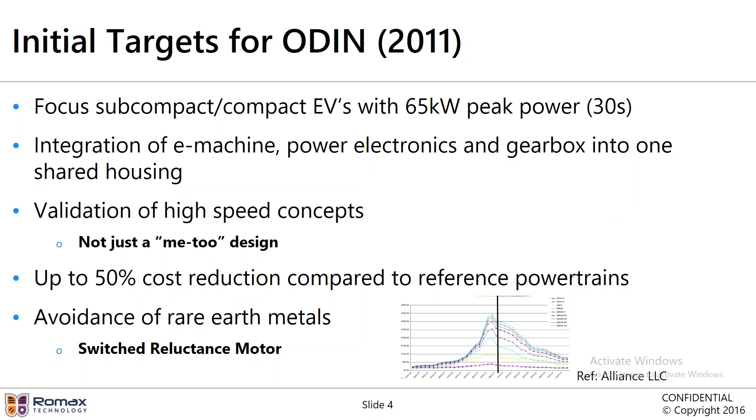Also at the time, we were tasked with avoiding rare earth metals. The graph you see there is the cost of rare earth metals, which going through 2011, prior to the setup of the project, had seen a price spike. This looked quite frightening at the time, so the change to non-rare earth metals was very much desirable. In setting up the project, we thought a switched reluctance motor is a design which hasn't really been used that much, certainly not for the main propulsion system, but it is worth investigating to see whether it can be used.

Prior to that, Romax had been busy for a number of years doing work on electric and hybrid vehicles, and the work we've done on ODIN has led to many other projects because we gained a lot of experience. You can see here the ODIN project is one of many projects Romax carried out during that time frame. Before the consortium was selected, we'd had reasonable experience in electric and hybrid vehicles, and we'd been working with some of the consortium partners previously. We were invited to join the consortium in order to carry out our work.

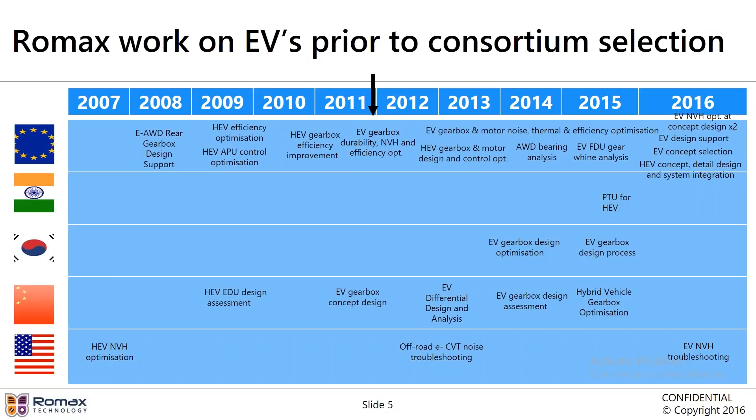We said that switched reluctance motors were one of the key items we were looking at. We know that switched reluctance motors have a very high dynamic content in terms of torque ripple, and so our experience in dynamic simulation was one of the reasons we were brought into the consortium. We also have ISEA from Aachen University, who were experienced in the design and simulation of switched reluctance motors, especially with regard to innovative control systems.

And then the consortium was led by Bosch, including GKN Driveline for the design and manufacture of the gearbox, SEAR Automotive for the manufacture of the housing, Fuchs for the design of the oil and supply of the oil, and then Renault was for the vehicle integration and setting the vehicle targets. The demonstrator vehicle is the Renault Zoe, and that's the application for which the driveline is being designed. And then the consortium was put together and the project was kicked off in September 2012.

So as we went through the initial parts of the project, we came across common challenges which are, I guess, common to all electric vehicle designs. What's the best layout? How many gear stages should we have? What's the overall ratio of the gearbox? And that will affect the overall maximum speed of the motor, because at the vehicle maximum speed, the rotational speed of the differential, I guess, is fixed. And so if you increase the overall ratio of the gearbox, then the motor can be smaller and more compact.

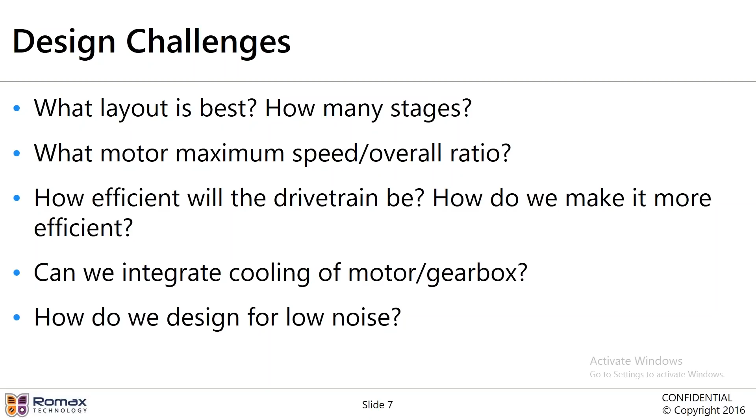In looking at the gearbox and the impact of the gearbox on the motor, we carried out some initial considerations. GKN and Romax were discussing this in the early parts of the design process, and we came up with some ideas. The obvious ones are simply single-speed gearboxes with maybe 2 stages, maybe 3 stages. There are actually some other ones. We can look at maybe two speed options. So 2 SP means 2 speed options. We could look at 3 speed options. Maybe we could look at having 2 motors. Some of those ideas were being expressed as possible designs.

And of course, in a design process, it's difficult to really simulate all of these and really do a quantitative assessment to see which is the best design. So at this particular stage, a lot of them were really qualitative. We were able to compare each of these layouts and each of these options really to see what did we think was the best design with regard to a series of design requirements and a series of design options. Different layouts here also express P means parallel, E means epicyclic, because we could have 3 stages which are parallel, parallel, parallel gears, or parallel, epicyclic, parallel, for instance.

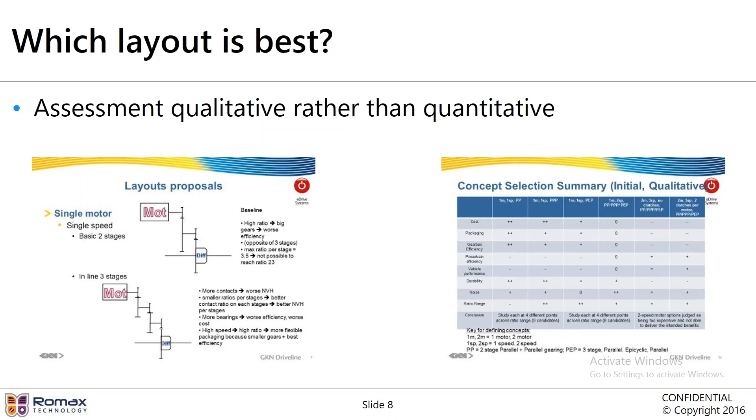And since we could still get a decent high-speed motor with 2 stages, we decided to go for 2 stages. So a simple single-speed gearbox with 2 stages seemed to be satisfactory for this particular application. Really no need, no benefit in making it more complicated than that. But it would still give us a decent amount of innovation, because of course we'd still go for the integrated cooling, we'd still go for the high-speed motor, we'd still go for the design for low noise. Having selected that, there's still a little bit of uncertainty. Okay, we knew we wanted to go to high speed, a high overall ratio, and this would achieve a smaller, lighter, cheaper electrical machine.

Okay, it would mean that there'd be a higher overall ratio for the gearbox, but there is still some uncertainty at this particular time. At Romax, we'd done a large number of projects, and we had done efficiency improvement projects for gearboxes for electric vehicles, and we've got a lot of test data where we validated our simulation against test data for the efficiency of gearboxes. But these were at conventional speeds, much lower input shaft speeds than we were considering here. And we didn't really have any test data to validate against for the high speeds which we were looking at here.

Indeed, we discovered at the start of a project that it was difficult to find test facilities to run at these particular speeds. Also, we weren't really able to do that much simulation of the overall driveline efficiency at these high speeds. At Romax, we could design gearboxes in Romax Designer and simulate the efficiency very quickly, in a matter of minutes. We could get the efficiency maps very quickly. But the corresponding efficiency calculations for motors using 3D finite element analysis took days, if not the best part of a week, to do an efficiency map. So it was very difficult to actually come up with a driveline efficiency model which was providing results in the timescale that was suitable for the design.

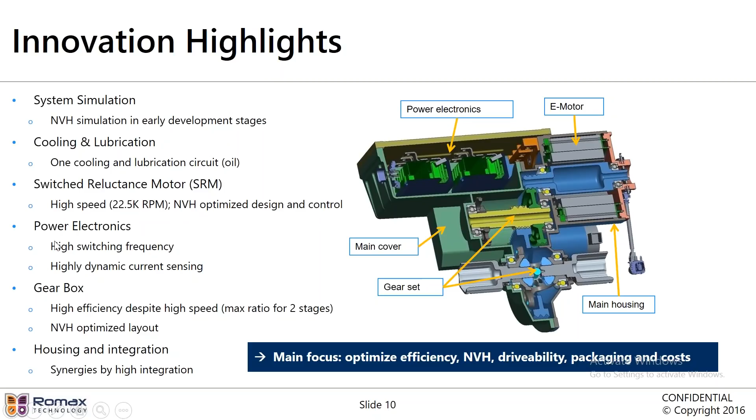So, in order to mitigate those high speeds, we would bring in NVH simulation in the early parts of the development process. Romax was able to offer that. And we're also looking at high degrees of integration with regard to cooling and lubrication. Aachen University were to develop optimized design and control of the switched reluctance motor. And from the power electronics, we would have high switching frequency and highly dynamic current sensing. We would aim for a high efficiency gearbox, which was going to be dry sump in order to overcome some of the problems with lubrication and high speed. And we were going to maximize the overall ratio with regard to what was possible for 2 stages. Of course, the NVH would be optimized for this particular design, and we would also look at any synergies that we could achieve with integration between the power electronics, the motor and the gearbox.

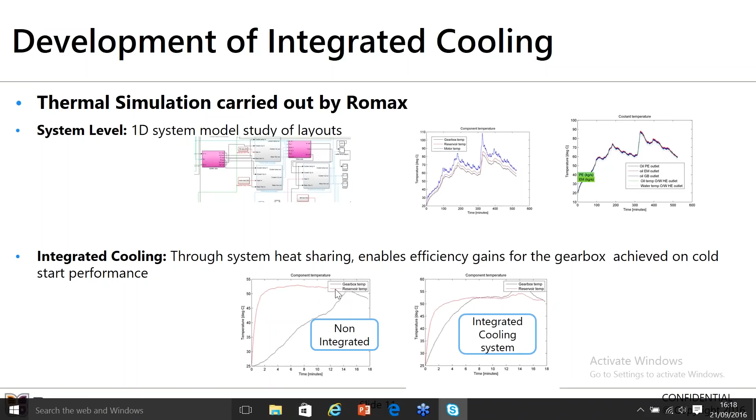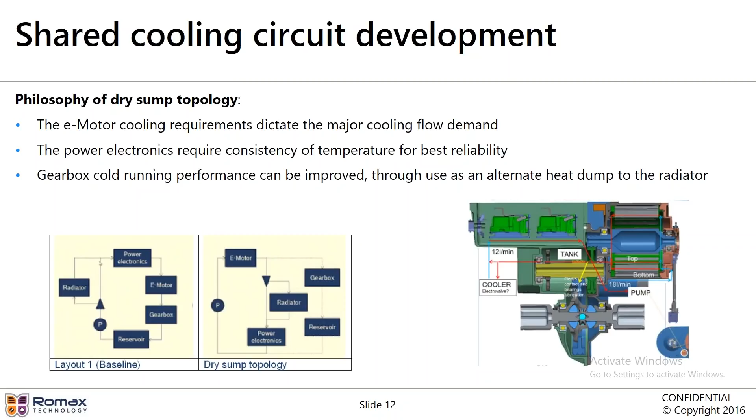Okay, this is also integrated with the idea of a dry sump topology, which enabled us to look at the best cooling circuit and also to design the gearbox for greatest efficiency. We also had to consider cooling the power electronics as well, because they require consistency of temperature for the best reliability.

The design of the lubricant was also carried out in this stage. We see that in the design and operation of an electric vehicle, we have a range of different operating conditions, from high load, low speed conditions to low load, high speed conditions. And this gives us different challenges for lubrication. Of course, in all of these conditions, we can simulate using Romax Designer what the tooth contact is and what the sliding velocity is at each part of the tooth.

And this data, we were able to supply that to Fuchs in order for them to actually start to develop the lubricant. So they were able to develop lubricants. They can carry out some mini traction machine tests, and they also had FZG tests for scuffing and load durability, and we can replicate that in Romax. And that enabled us to actually look at the lubricant and its effect on the efficiency of the gear mesh, not just in terms of the viscosity of the oil, but also in terms of the additive pack as well.

So when we were looking at this, one of the guys from Fuchs came up with a good phrase saying that we were designing the oil for the machine and the machine for the oil, which is quite an accurate representation of what we were doing. We were supplying Fuchs with data on how the teeth come into contact and what the surface roughness is, and Fuchs was supplying us with data on how the lubricant was reacting to that, what the lubricant performance was, and we were able to quantify that in terms of the overall efficiency improvement.

And the FVA 345 method, which we've implemented in Romax, allows us to identify that, and this way we can differentiate between different oils in terms of their effect on the efficiency. And you can see that in certain instances the impact can be quite noticeable, and this obviously depends on the operating condition. As I said, one of the concerns we had within the project was how to design something that is quiet, so we had to design something that's good for low noise.

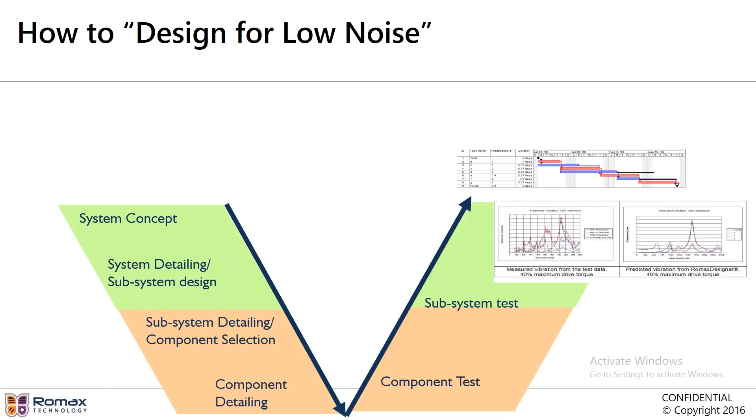We're very familiar with the process of designing something and developing something, and many times when we've come to solve noise problems, we are involved at the end when someone has designed something, they're testing it, they assemble it, and they've got a noise problem. And of course we can simulate things, we can validate against test data, and we've done this many times. The trouble is that at this stage it's all a bit late. There's going to be someone with a Gantt chart who's saying, sorry guys, it's too late, we've got to implement this design, there is a vehicle release date.

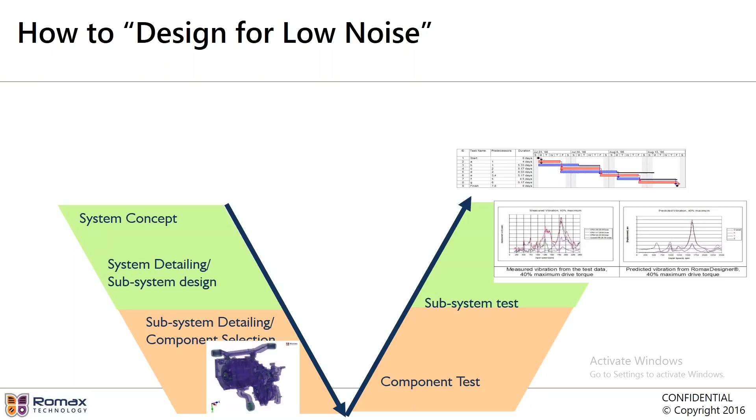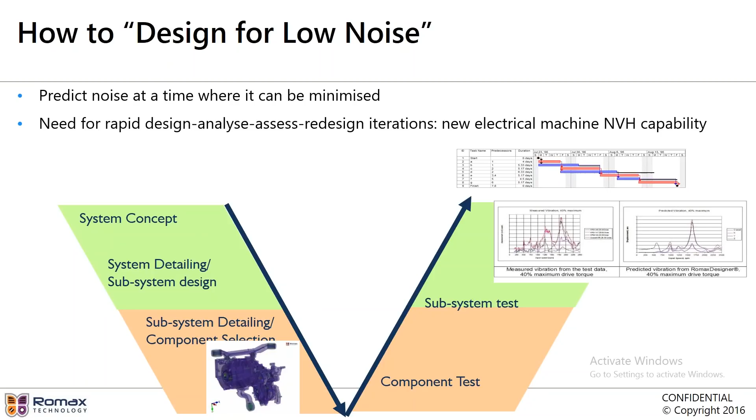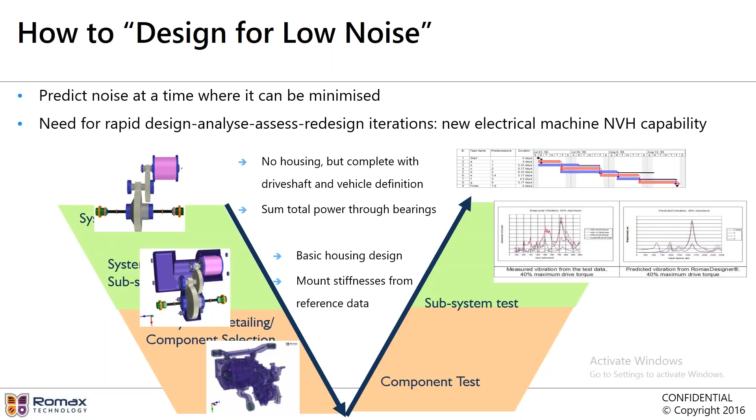What we really need to do is see what we can do in terms of designing something for noise not at the end of the design process, but earlier in the design process, when you can actually carry out rapid design, analysis, redesign iterations, where you're designing the housing, and maybe even before that, when you don't actually have a housing. So that's what we set off to do in this particular project.

At the concept stage, we have no housing, so we cannot predict the radiated noise, but what we can calculate is the sum total power coming through the bearings. And we're not predicting how noisy it's going to be, but we can assess one design against another, and by selecting the quietest design, we give the design the best possible chance of being quiet at the end of the design process.

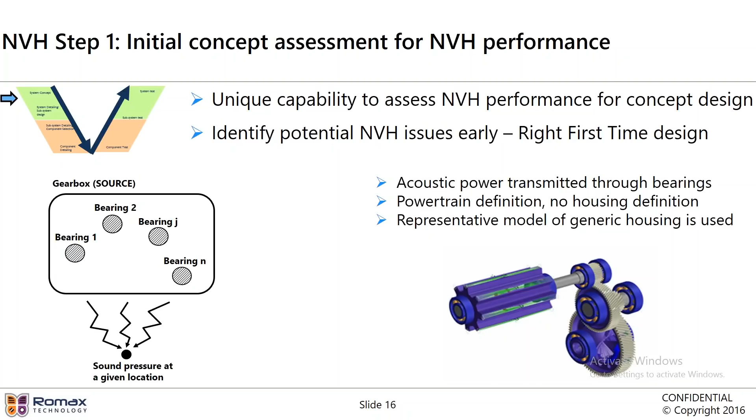In doing so, we had to check that our method was correct. If you calculate the vibratory power going through the bearings of a simple design with no housing, you actually get a result of a total power which is very different from what you get out of a full model with a complete housing. But what we managed to do is develop a simplified representation of the housing which we could apply at concept stage, and we've discovered that the results are very

similar. So this sort of representation of a model which we can do at concept stage is sufficient because we get more or less the right result, and also the shape of the vibration across the frequency range is accurate. So that allows us to use that sort of model and that sort of assessment right at the very early stages of the design process to assess which was the quietest layout.

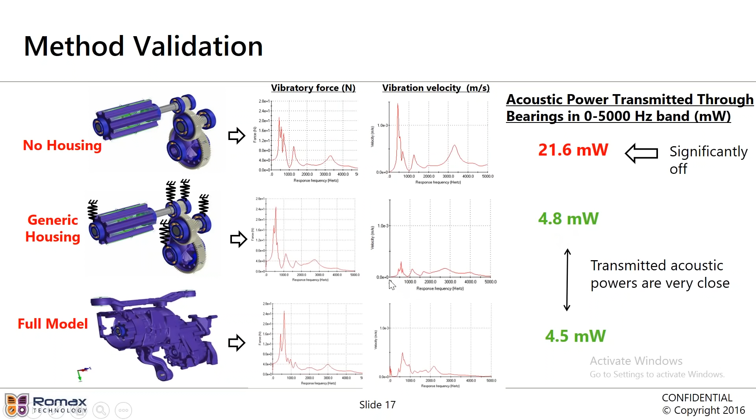The next stage of doing that was to actually build up a housing. Of course, we didn't want to wait to have a fully detailed housing in order to make some recommendations. So GKN created an outline design which wrapped around the housing, and we were able to use the mounts. These are the mounts, and there's a mount stiffness onto the housing in order to get the overall behavior of this structure from a dynamic point of view.

We were able to simulate this system with regard to motor noise, motor excitation, and also transmission error. And you can actually see the peaks. These are peaks to unit excitation. So this is the conditions at which the dynamic response of the system is at its worst. So regardless of what your transmission error is, we could predict that there's going to be a peak at this particular value, and we can do something about it.

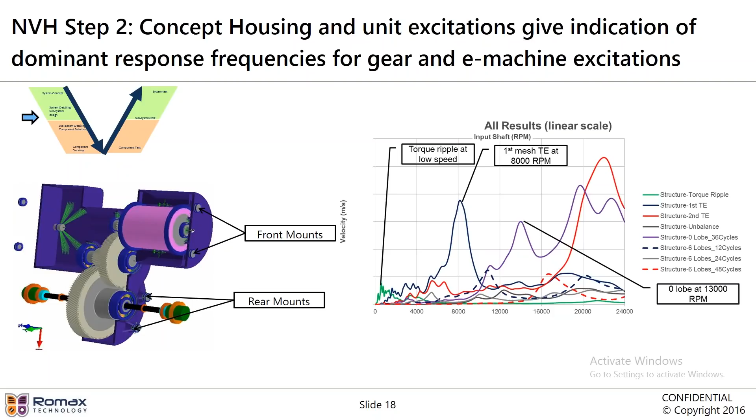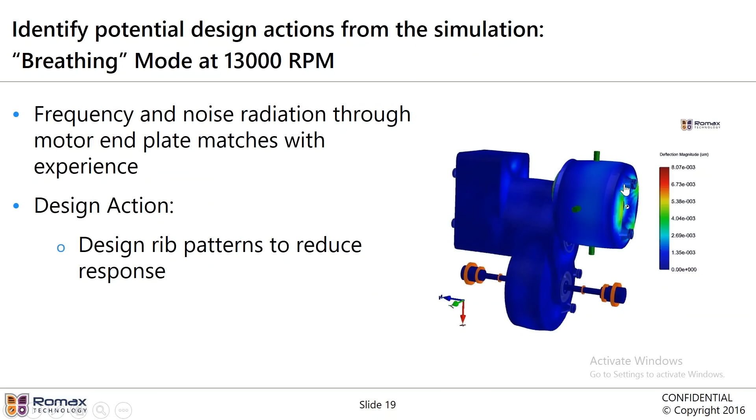So we're reducing the noise, not just in terms of reducing the excitation by designing good gears, but reducing the dynamic response. And so we could see there was a peak due to motor noise. This sort of breathing mode at 13,000 RPM was because we had no ribs on the end of the motor, and we could feed that back to the design team in order to put ribs there. And they were able to implement this in the design that they were carrying out. And then when we looked at the simulation, that leads to a reduction in vibration here.

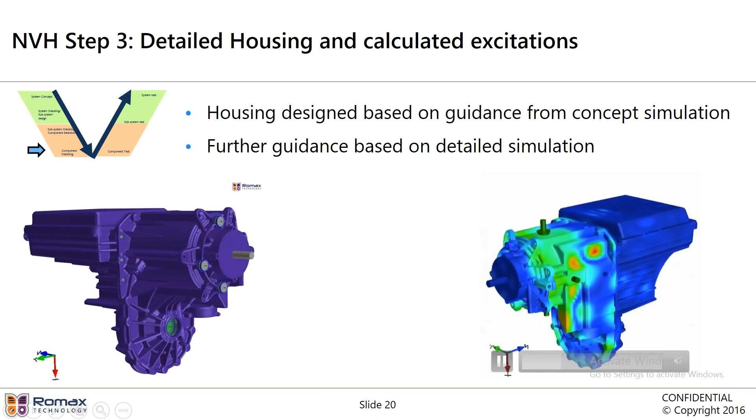We could also carry out the simulation of other electromagnetic forces, such as this 6-mode excitation, and we could see that we have substantial reductions in the noise arising as a result of this. We also got reductions due to the radial forces, so 13 dB reduction here, and we were able to reduce due to the radial force and also transmission error as well.

That sort of reduction there indicated a substantial reduction in the response due to transmission error. So that indicated that the design for low noise was successful, not just in designing quiet gears, but also designing for a low system response.

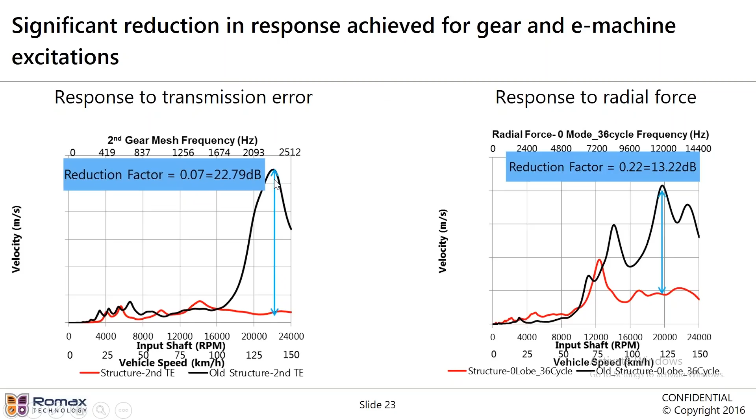We spoke earlier on about how we would design for the lubricant and its effect on efficiency, and a number of lubricants were tested. We're not able to share the details of these lubricants with you, but we can show that they did actually have a substantial effect on the efficiency of the gearbox. So this allowed us to close the loop.

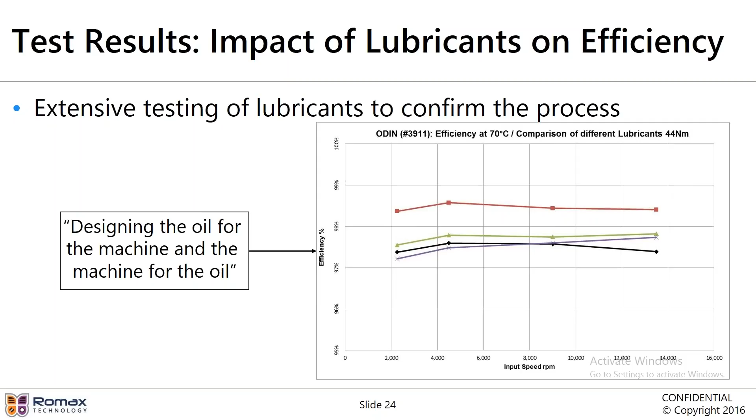We were able to show that designing the oil for the machine and the machine for the oil had been successful because the lubricants that we predicted as being efficient were actually efficient when we tested the entire gearbox together. And this was successful not just for the gearbox in terms of good lubricants, but also for the actual performance of the gearbox itself.

The Odin gearbox was compared against testing of a baseline gearbox. This is a current production EV gearbox from another manufacturer that we took out of a vehicle. And across the speed and load range, it showed that the Odin gearbox that we had designed had better efficiency. So that showed a success.

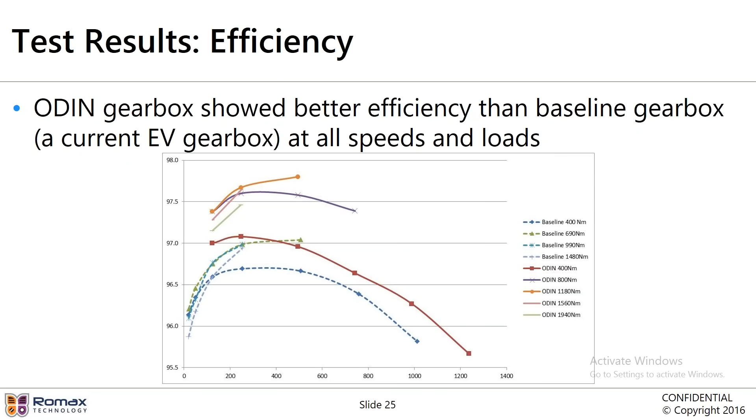So we did actually have other tests. The gearbox design was successful. We did run some NVH testing, but at this stage the boundary conditions were very different from the simulation which we'd done originally. Obviously the first simulation we'd done had been with the vehicle boundary conditions, and the actual NVH test was very

different. And at this stage the project had moved on because unfortunately the switched reluctance motor had been tested at that particular time and did not meet the efficiency targets. This was despite the novel control strategy that had been developed.

Also at that particular time, at the end of loop 1 as we called it, the price of rare earth metals was less of a problem. If you recall right at the start, the peak in 2011 had been followed by a reduction in the price in subsequent years. The economic justification for switched reluctance motors had reduced.

So as a result of that, for loop 2, which was always planned, we decided to go for an induction motor based on a design that Bosch already had, but with a similar gearbox to loop 1. So the project was extended by a year and a slightly different technical route was taken.

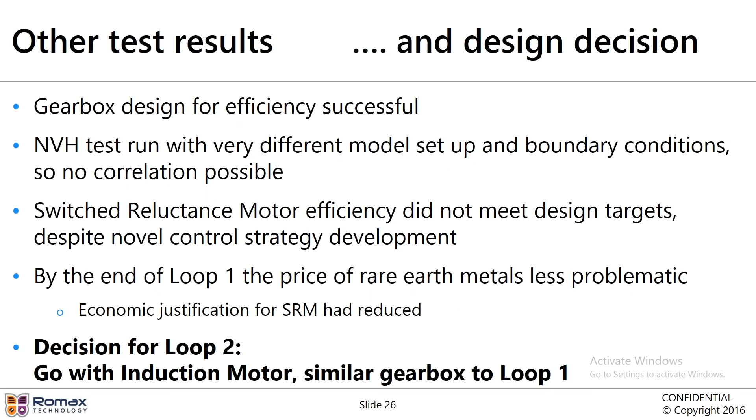If we look at the lessons learned, we see that the design of integrated electromechanical drivelines brings new uncertainties in doing this work. So there's some things we don't know. We don't have a long period of experience of designing these systems in the same way that we do for, say, manual transmissions. It's difficult to develop a new simulation process as well as doing a new design.

So if you want to innovate in the design, it's difficult to innovate on your simulation process at the same stage. One of the guys at Renault came up with this phrase of technological building blocks. And so it is important that these are in place before you start your design, as opposed to trying to develop them at the same time. On the other hand, we did find that we were able to use upfront simulation, such as we did in NVH, and that was able to provide great benefits within the project.

It did also show that close collaboration between the motor and gearbox design activities is important, because there were times where it needed to be clarified who owned which component and which design parameter was being chosen between Bosch and GKN. Remember, when you've got an integrated electric driveline with integrated motor and gearbox, we have a single shaft which supports the rotor of a motor and also the first input gear pinion.

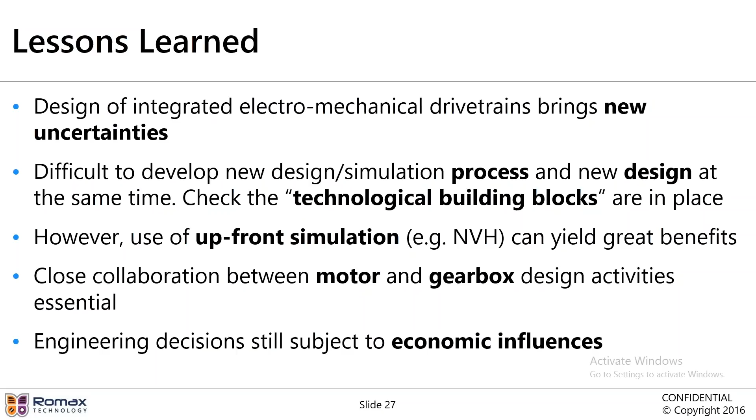And despite all of this technical work, of course, we have to accept that engineering decisions are still subject to economic influences. So, as a summary update of the project, the motor has been changed to an induction motor, which is supplied by Bosch. The maximum speed is now 15,500 RPM. So the overall ratio had to be changed, which meant we had to design new gears.

But the gearbox design process that we used in loop 1 was replicated to make use of the successes that we had for efficiency and lubricant design. Also, the methods for designing for low noise and thermal performance in an integrated system were carried over. The tests of these have just started in the last couple of weeks. We haven't got any data at the moment that we can share with you, but we will certainly be looking to disseminate that worldwide when it does become available and when this project does conclude.

So, as a summary, Romax has had first-hand, very detailed involvement in the design of a full electric vehicle project with cross-industry collaboration involving the motor, gearbox and vehicle together. It has actually kicked off a large amount of R&D work, which is based on the limitations of what we saw as the state of the art in the design and understanding of electric vehicle drivetrains. And so this has allowed us to develop further methods which have moved our capability on further. And very much this has surrounded the understanding of the interactions between the electrical system and the mechanical system. And this is essential for design success.

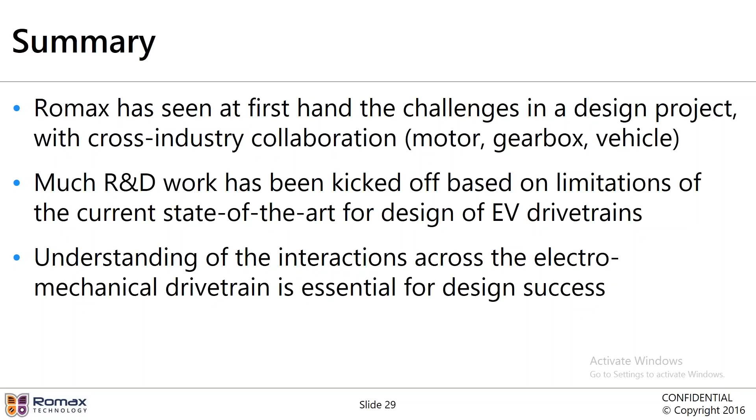So that really has become part of the drivers for the electric machine modeler, which is part of the latest release of the software, where we take the excitations of the motor and put that into the simulation of the combined system for the gearbox and motor. I think that was demonstrated in the previous webinar, and also I think the next webinar explains a little bit more about how the excitation from the electric motor can be simulated.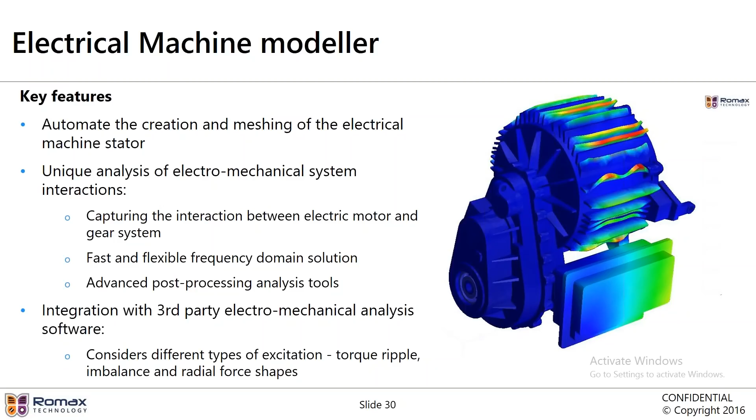Okay, so there's one question, which is: why did you choose an induction motor because of a reduction in rare earth price? If that was the reason, you should have gone for a brushless DC or AC. Induction motors don't have any permanent magnets, which is

correct. But part of the reason was also, well, the switched reluctance motor failed itself because of the efficiency. It didn't meet the efficiency targets. So that was the main reason for discounting it, and the project wanted to move on. I think it was just partly that Bosch had an induction motor which was available at the time that had been designed and could be modified in order to be applied to this project. So I think that was the main reason. So I hope that's answered that question.

The next question which was asked was, are there different ratios for a switched reluctance machine as opposed to induction motors? Well, again, in the switched reluctance motor, we chose the overall ratio in order for it to be as high as possible because we wanted to set our challenge of having a high speed machine. When it came to the induction motor, then we came up with the 15,500 RPM because that was the speed of the existing machine.

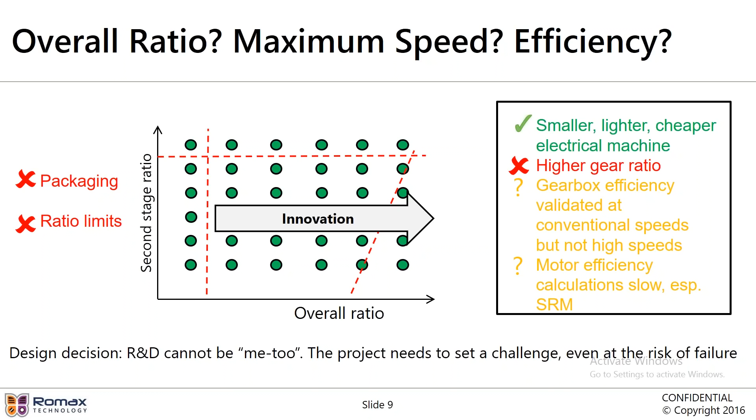And there's one final question, which is, does the process work for wet sump in terms of designing for efficiency? So we've had the design for the efficiency and design for the lubricant. This process works for both wet sump and dry sump designs. We assume that the lubricant gets into the gear mesh and that the viscosity and the additive pack of the lubricant acts on the gear mesh in order to give a certain efficiency. And this process works whether the oil is splashed or whether it is sprayed with a dry sump. So this works whether it's dry sump or wet sump.